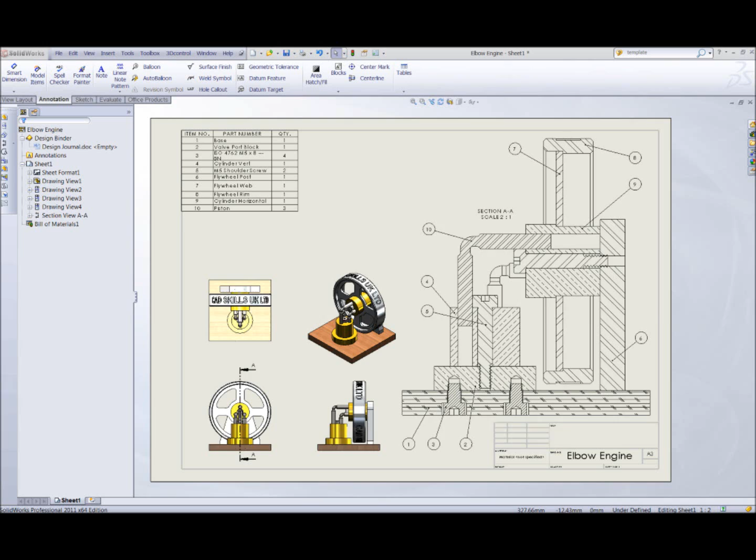Okay, next we're going to go through the process of creating the assembly drawing of the elbow engine. So we'll open a new drawing, A3 ISO. We're going to close that first of all because I want to look at the drawing template. It's rather bulky as a default through SolidWorks here.

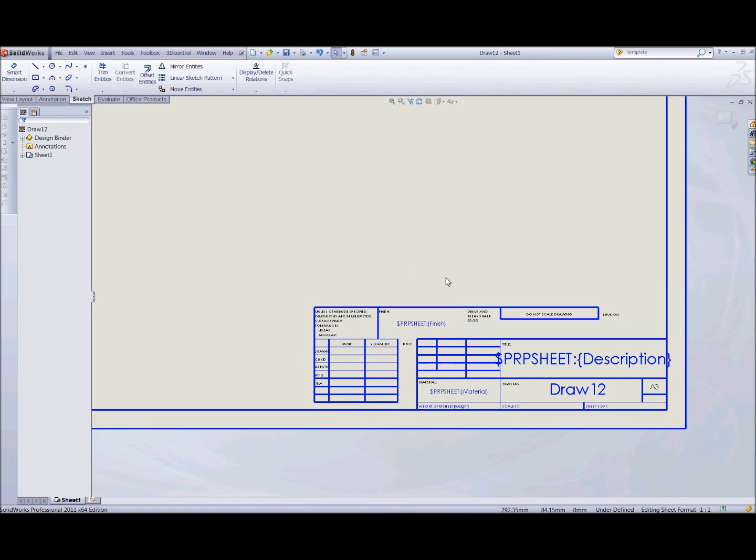So I'm going to right click, edit sheet format. Then I'm just going to remove a lot of the items that we're not going to need in this instance. So I'm just using my power trim, and then I'm going to go in afterwards and just simply remove those items. Once I'm happy with that, I can then edit sheet and come back out of that, and that gives us a much more basic sheet format.

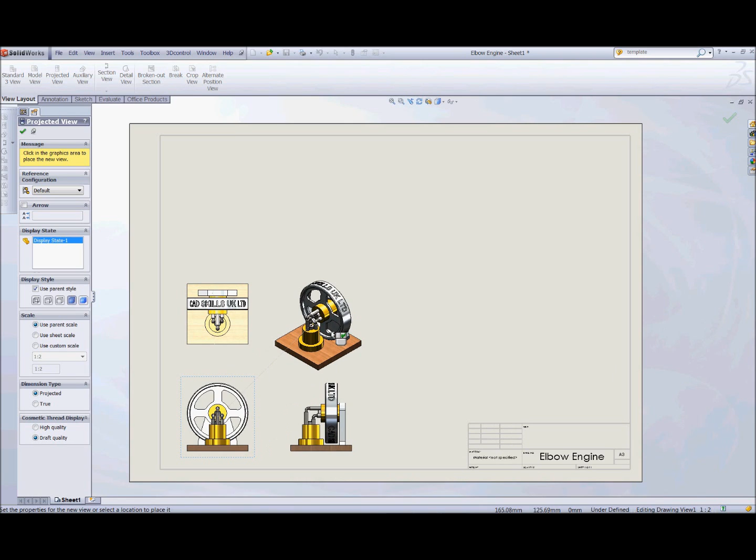So we're going to go to view layout, and we're going to open our elbow engine, front view, shaded with edges. So we're going to have a front view, we're going to have a top view, a side view, and we'll put an isometric view in place. And we'll accept those. We will see that these are aligned, so that's vertical and that's horizontal to the front view. However, this is still moving.

So what I want to do, just to make it a little neater, is to right click on here, alignment, align vertical by center, and then click this view. And you should find now that it will only move up and down. If I now right click on there, alignment, horizontal by center, click this view, you should find now that it's located in place. It seems to override one view or the other, so you can check, but in this instance it's absolutely fine.

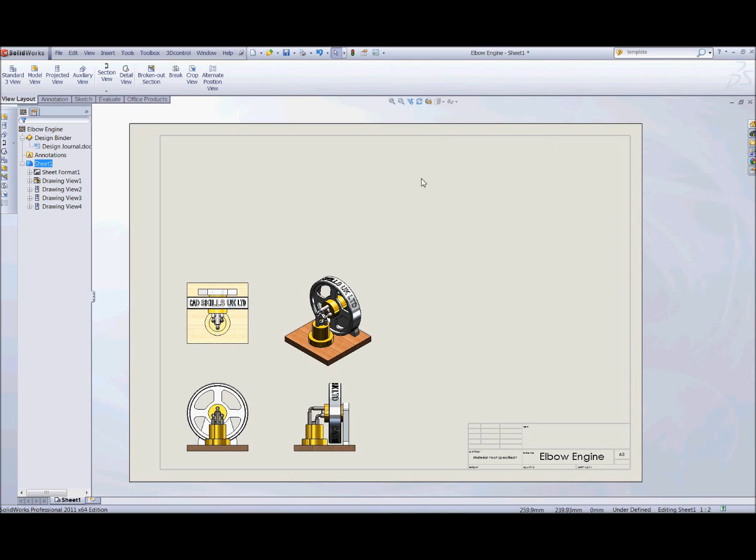Next we're going to produce the sectional view, which is going to go into here. So we're going to go down to the front, and we're going to section view, going to highlight the top quadrant, and we should get a tracking line. Let's have that tracking line, just going to pull that section line down here, auto hatching on, and then press OK. You'll find the section will automatically go just horizontal.

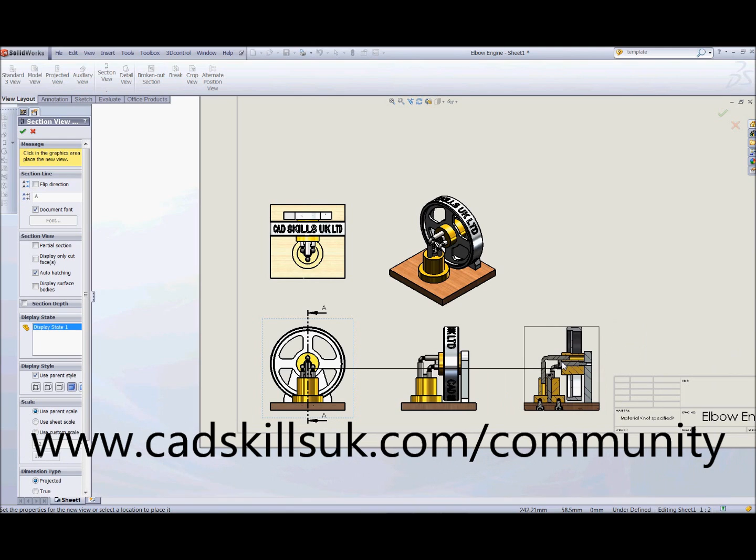If I hold Control key, I can break the alignment, and then I can just left click on the screen. Alternatively, if I haven't done that and I have actually put it horizontally aligned, I can right click on the view, alignment, and then you'll get break alignment, and that will then allow you to move it around the screen.

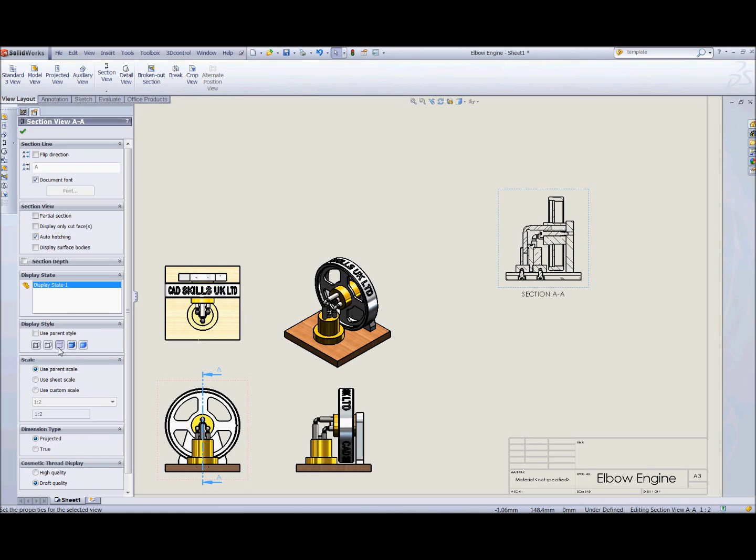Okay, we're going to change that view. So we're going to go to hidden lines removed, and we're also going to change the scale, and we're going to make that a 2:1. And we'll accept that. You can see it's quite a large view, so I'm going to move this text up into this position. I'm just going to move this view like that, so that's much better.

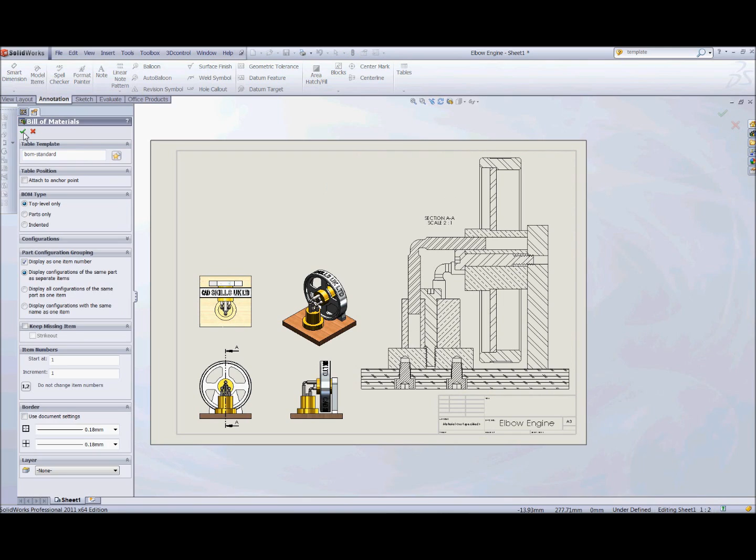Now I'm going to add the bill of materials, so annotation, tables, bill of materials. Just going to click on the section view, accept the default, click that in place. You can see at the moment that actually I've only got 8 parts here because the flywheel sub-assembly comes through as a sub-assembly. So if I go back in and change this to parts only and accept, it now breaks individual parts down. This column here, we're actually not going to use that, so I'm just going to click on that, highlight the column, right click, delete, and then delete column.

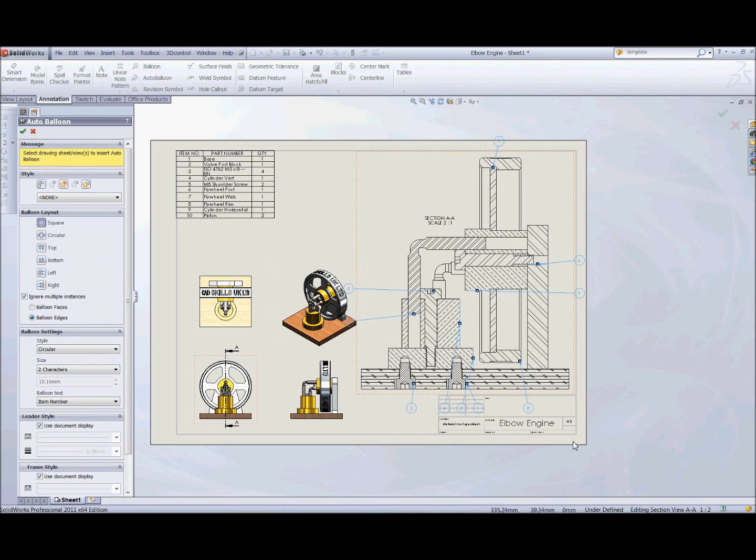Finally, I'm going to add the balloons. Now I could go in and select the view and go auto balloon, and you'll see it will automatically populate it on the screen. However, that can be a little messy, so first of all, as we only have 10, I'm just going to go through the process of locating the balloons.

So I'm just trying to make them as neat as possible. You do get small yellow tracking lines appear. And again, I'm trying to select inside the actual object rather than on an edge, because if we select on an edge, it can become quite confusing at times. And when you auto balloon, they do come in as default on the edge.

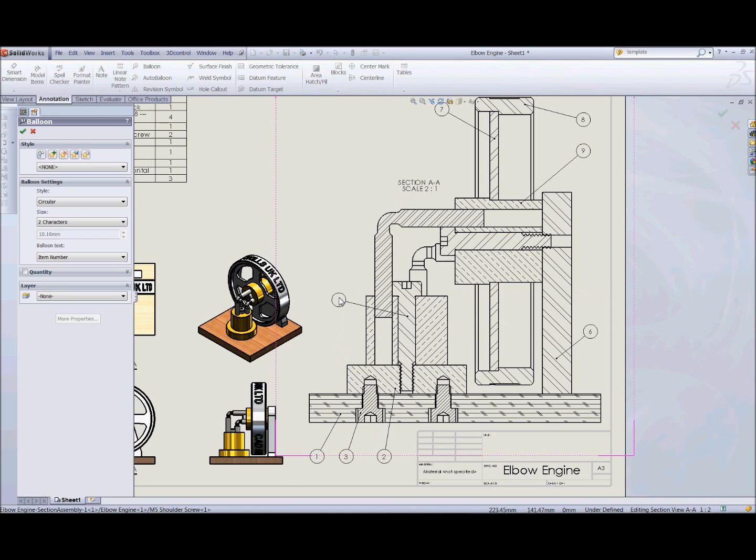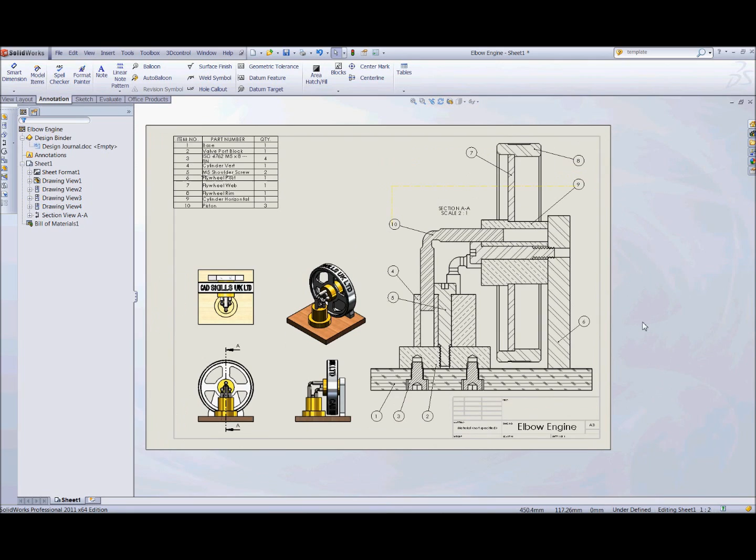Here. Zoom into here, this part here. And then a piston. I'm just going to pick this piston. Okay, and a quick check, 10 items, so 1, 2, 3, 4, 5, 6, 7, 8, 9, 10. And that's it. You can go down, you can add the details into the title block, your name, etc. But that's the assembly drawing completed.